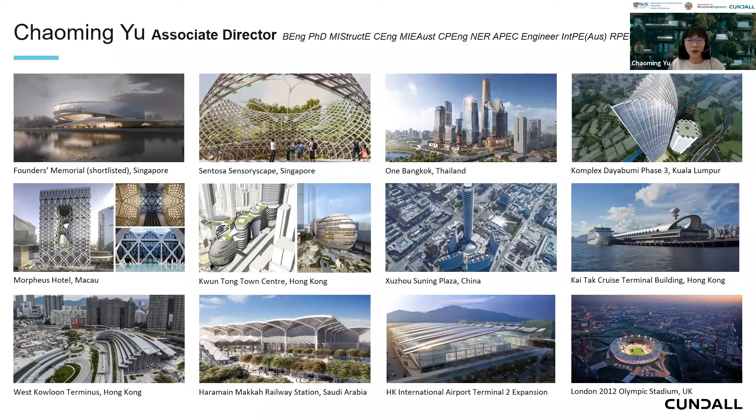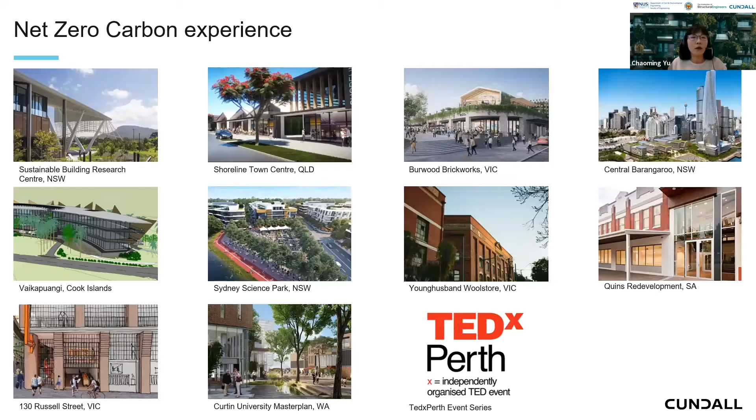About Cundall, Cundall is a multidisciplinary consultancy, and we have 21 offices globally and 8 offices in the APAC region. We became a One Planet company in 2012 and the first carbon neutral consultancy in 2020. Cundall recently launched a Zero Carbon Design 2030 initiative. We target to design all our projects to be zero carbon by 2030. So here are some of our net zero carbon experience around the world.

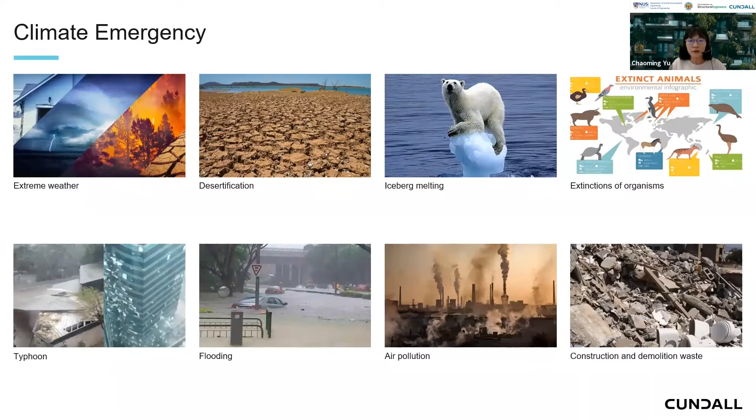So why design for net zero? We are all aware that we are living in a climate emergency caused by increased carbon emission. There are extreme weathers, typhoon, flooding, iceberg melting, extinction of organisms, and air pollution. So if we don't take any actions and keep increasing the carbon emission, it will cause catastrophic results very soon. As an industry, the building and construction sector is responsible for 38% of global carbon emissions. This is based on last year's data, and we consumed a staggering 40% of the world's natural resources. So all this has a major impact on our planet.

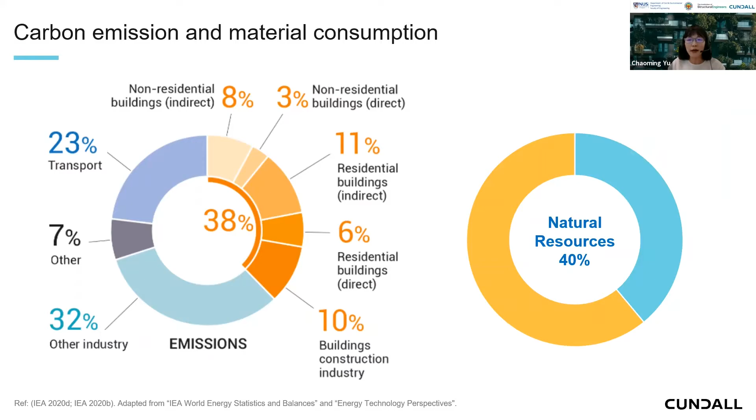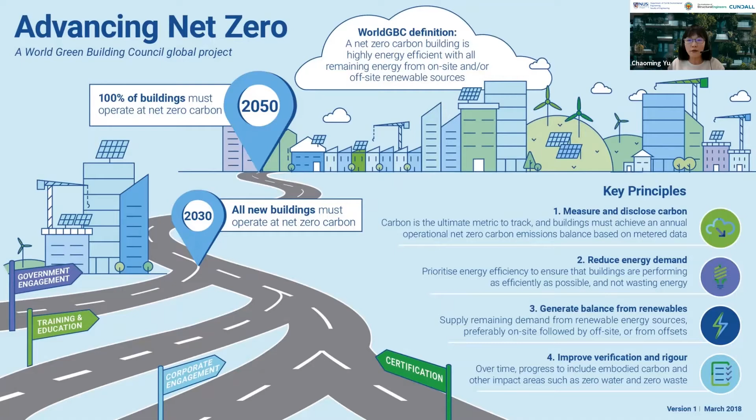So we must make a change to reduce the carbon emission. The World Green Building Council initiated the Advancing Net Zero program to promote working towards decarbonization by 2050, in order to limit global warming to less than 1.5 degrees Celsius. So here are the targets: by 2030, all new buildings operate at net zero carbon and reduce at least 40% of embodied carbon. By 2050, all buildings to be net zero in whole life carbon.

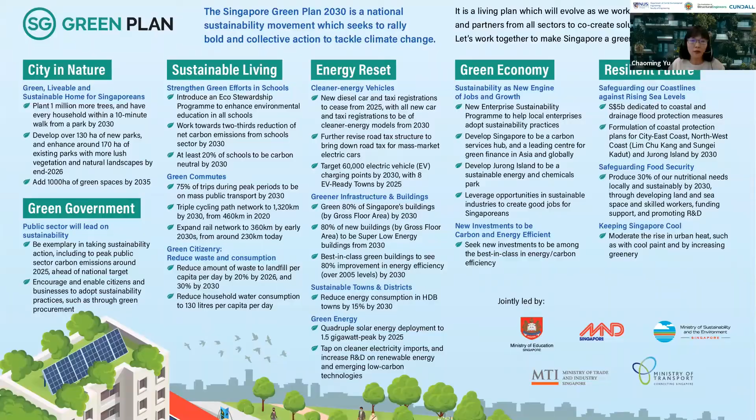And in the recently released Singapore Green Mark 2021 document, it basically aims to raise the built environment sustainability standards and encourage conducting whole life carbon assessment on both new and existing buildings.

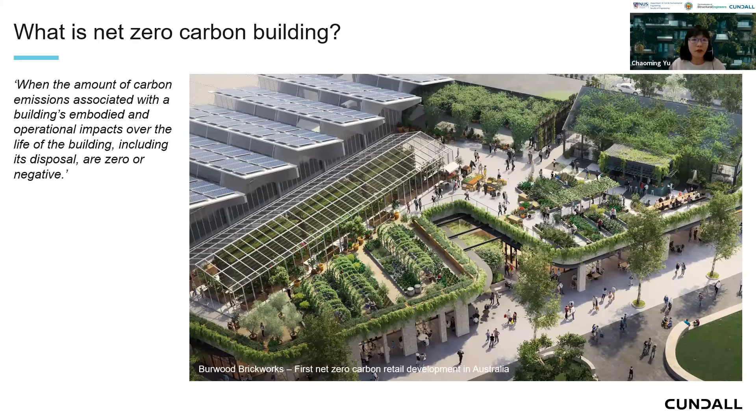So you may ask, what is a net zero carbon building? The definition is: the amount of carbon emissions associated with a building's embodied and operational impacts over the life of the building, including its disposal, is zero or negative.

So we understand the total carbon footprint for buildings is composed of embodied carbon and operational carbon. And we need to look at the whole life cycle to ensure the carbon emission of the building is zero. So in order to do that, we need to decrease both embodied and operational carbon as much as possible.

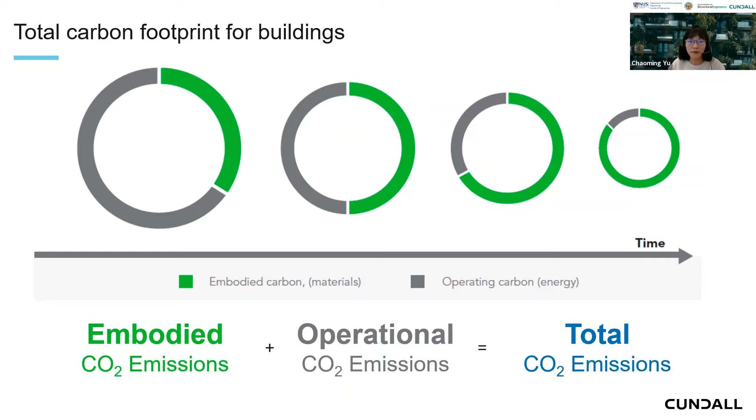This is Cundall's 7-step strategy in achieving net zero carbon. So it's from passive design optimization, reduce operational energy demand and consumption, eliminate fossil fuels like coal, gas, oil, and provide on-site renewable energy and storage where possible.

We should maximize using renewable energy like solar panels and wind energy, etc., and limit the upfront embodied carbon. Consider whole life carbon in conjunction with whole life costing, and publicly disclose performance annually using the WRAP database.

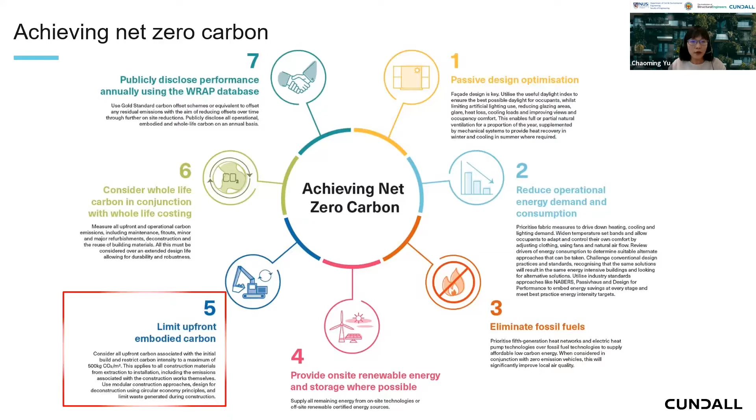So for structural engineers, our focus would be limiting the upfront embodied carbon.

So what is embodied carbon? The embodied carbon is the carbon footprint of a material. It's the total greenhouse gas emissions generated throughout the life cycle of the material.

This chart shows the building whole life cycle stages, including the upfront, which is from A1 to A5, including material extraction, manufacturing, transportation, and installation. And for the in-use stage, which is from B1 to B7, it covers maintenance, repair, replacement, and operational energy and water. And end of life would be deconstruction, transport, waste processing, and disposal.

For stage D, the reuse, recycle, and recover is beyond the building life cycle. As you can see, except for B6 and B7, which are operational carbon, all the rest is embodied carbon.

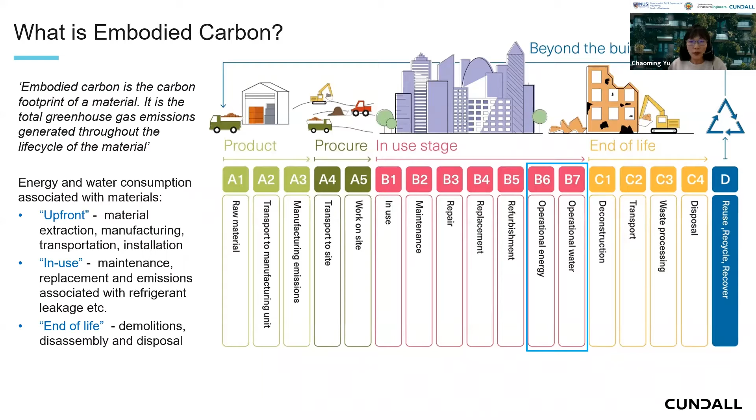Here I give an example, actually from the IStructE guide. It's an indicative distribution of A1 to C4 emissions for an ultra low energy residential model. The operational carbon is only taking 23%, but the upfront embodied carbon is taking as much as 55% of the total carbon footprint.

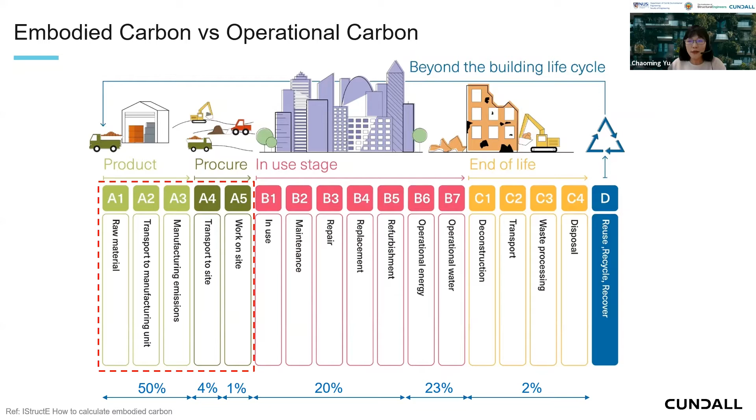So this part shall be our focus to reduce. Also, this is the minimum scope for a structural embodied carbon assessment.

In terms of the proportion of embodied carbon directly attributable to the structure, it is in a range of 50 to 85%. As you can see, the structural embodied carbon would contribute to the most of the carbon footprint of a building. It is our responsibility to manage and reduce this part of carbon emission.

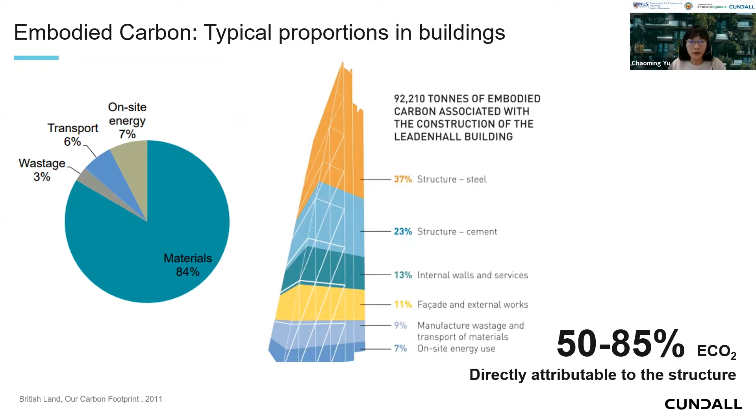Then how to calculate embodied carbon? Basically, it's the material quantity times the carbon factor for the life cycle modules.

IStructE published a guide called 'How to Calculate Embodied Carbon' last year. It's very informative and useful for understanding the methodology. I recommend everyone to have a read if you are interested.

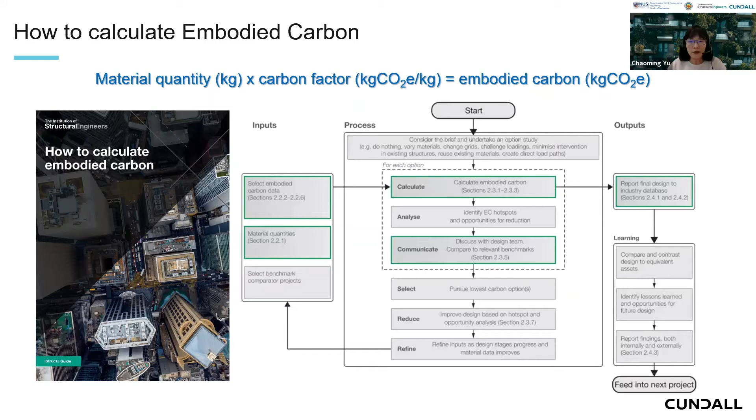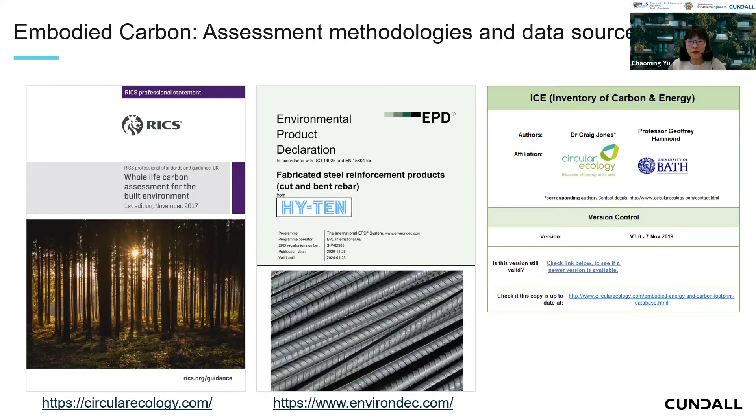And there are also other guidance and databases you may refer to, like RICS whole life carbon assessment for the built environment, and the ICE, the Inventory of Carbon and Energy database, which is a commonly used database that provides the carbon factor for stage A1 to A3.

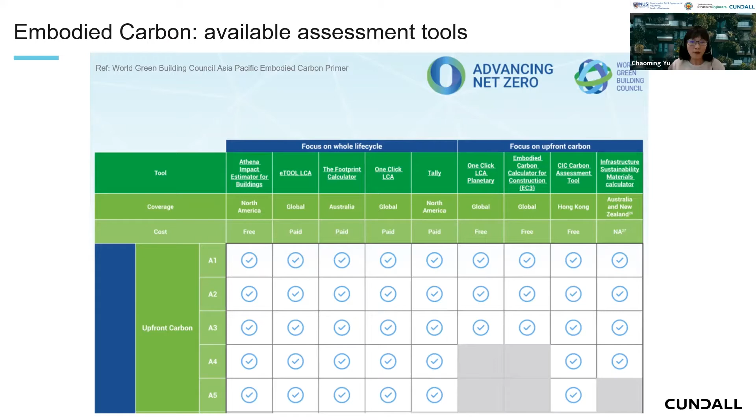And here I selected some tools. One is IStructE's structural carbon tool. It covers the whole life cycle carbon assessment.

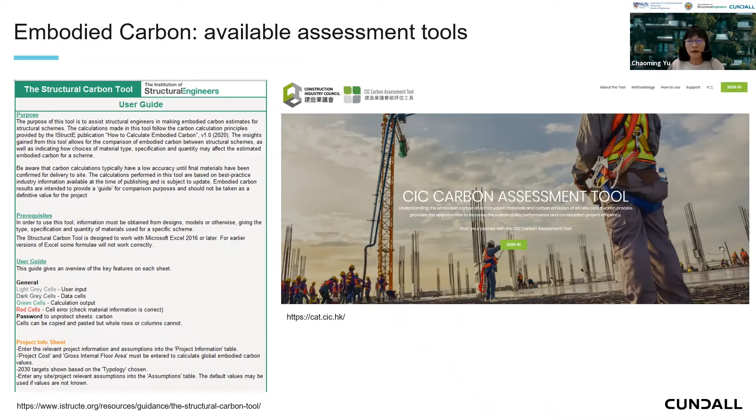And another one is the Hong Kong CIC carbon assessment tool. It's an online assessment tool, and Cundall assisted the Construction Industry Council in the development of this tool. They are both free to use, so you can give it a try to help you understand embodied carbon assessment.

In Singapore, according to the Green Mark 2021 document, we can use either the BCA carbon calculator or the ICE carbon database. The current BCA carbon calculator has a limited database. For steelwork, we only have two options: primary steel and recycled steel. So it wouldn't be very accurate to use for assessing embodied carbon on the project.

But I believe this will be further developed to include more materials. In the meantime, we can refer to the ICE database. As the carbon factor is geography dependent, before a more developed database becomes available, I would suggest reviewing the

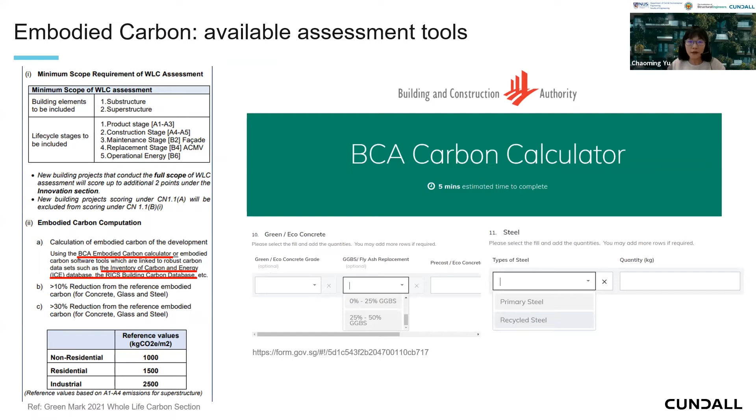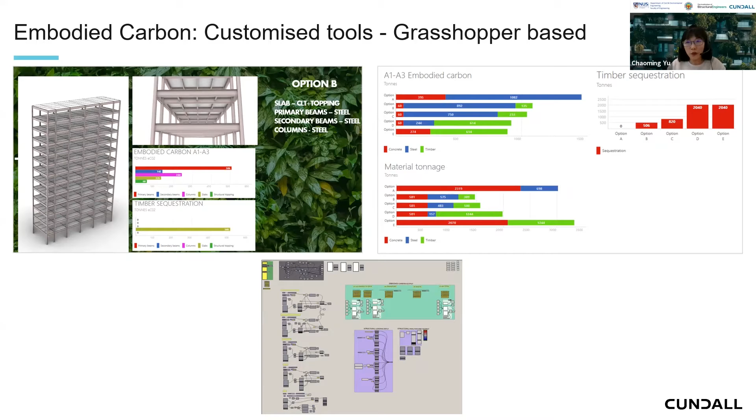carbon factors used on the project with the supplier to ensure the assessment is more project specific. Besides the commercial tools available in the market, you can also build your own tool using the applicable database. Here it shows our in-house Grasshopper-based tool. It can assess the embodied carbon for different options efficiently and present the results graphically, so it's very straightforward to show which option gives the lowest embodied carbon.

We also developed a Revit-based tool via an in-house Dynamo script. It can assess, tabulate, and present all the options against the target in one go.

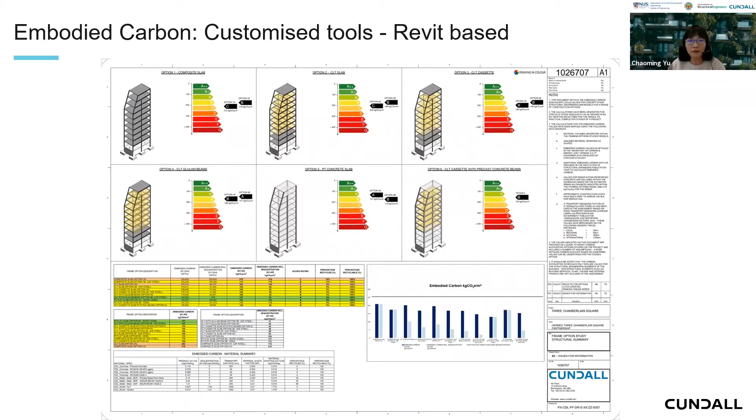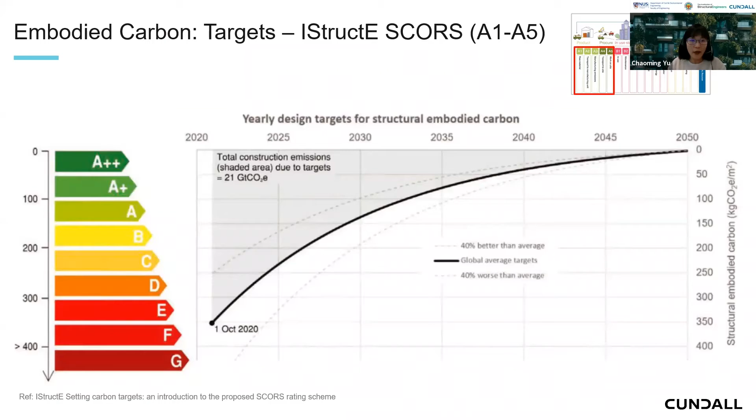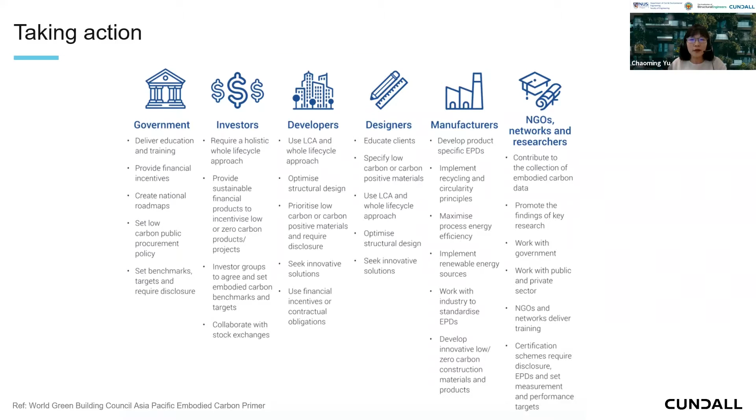Then how can we reduce embodied carbon to meet this target? This is a joint effort by all the parties, from the government to the investors and developers, designers, manufacturers, and researchers. So we as designers shall educate clients and let them understand the impact of embodied carbon, specify low carbon materials, and use the life cycle assessment approach, basically from the beginning of the project to the end. And we should optimize our structural design and seek innovative solutions.

So for the big picture, we shall design for the circular economy rather than the linear economy. The linear economy is to design, build, demolish, and dispose. But the circular economy is refurbish, reuse, reduce, and recycle.

So we should conserve resources to minimize the quantity of structural material used, and specify and source materials responsibly and sustainably. We should design to eliminate waste and ease of maintenance, basically design for reusability and flexibility, and manage the waste from demolition, excavation, and construction.

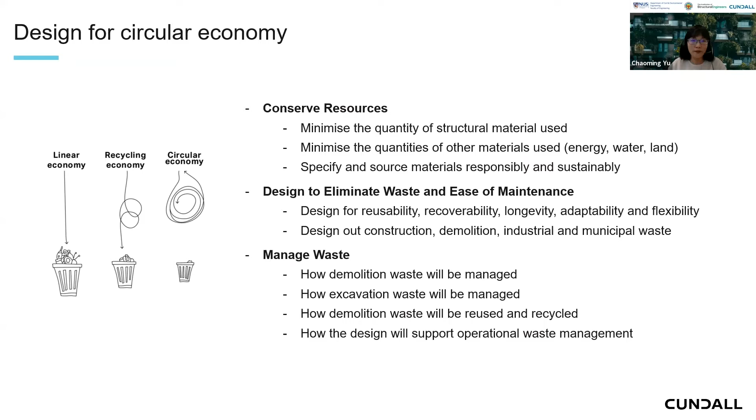So basically at the planning stage, we can challenge the brief and propose alternatives. Do we really need to demolish the existing building and build a new one? Can we just reuse the existing building structure? Can we just do some refurbishment, A&A work, basically to reduce the majority of the embodied carbon for the building?

And during the design stage, we would focus on building clever, so basically making the low carbon solutions, like specifying low carbon materials and doing structural optimization.

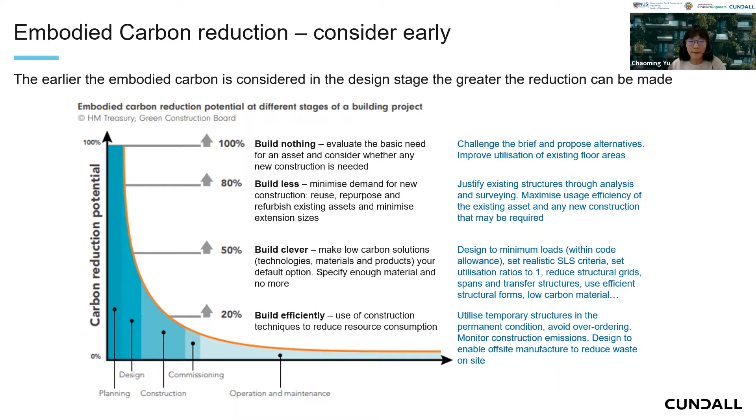And in the construction stage, you can see the potential for reduction is the least, because what we can do is only focus on construction techniques to reduce resource consumption, like utilizing temporary structures in the permanent condition and maximizing prefabrication to reduce waste on site.

So we know the biggest reduction on embodied carbon is to reuse and refurbish the existing building. However, more than 90% of buildings in the world were demolished before the end of their serviceable life. So we need to change our industry's mindset to move towards a more sustainable development direction.

Here I selected one project example in London. This is an office building, and they refurbished the existing building structure and added a few floors on top, and replaced all the facade with 85% recycled glass and 100% recycled aluminum, and used 80% recycled steel.

So just from reusing the existing structure and saving the construction waste from building a new structure, it saved more than 21,000 tons of carbon emission. So it's really massive. We should really consider reusing and refurbishing existing building structures.

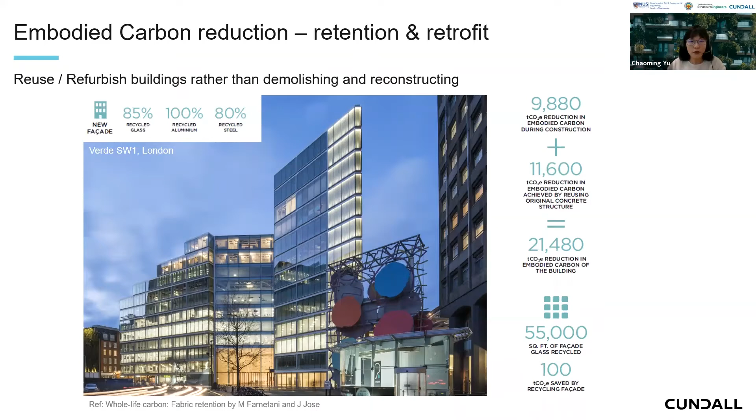As embodied carbon is the carbon footprint of a material, we should specify low carbon materials on the project in order to reduce the embodied carbon.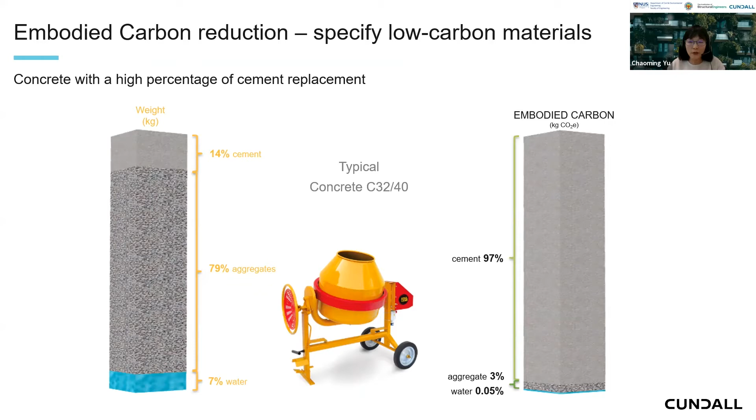Concrete is the most popular construction material, also in Singapore. If we look at its mix, the biggest component is aggregates. This is showing typical concrete C32, where aggregates take 79%. But if we look at its embodied carbon, cement is actually taking 97% of the embodied carbon. This is because most of the carbon emission was generated from the chemical decomposition of limestone. So if we reduce the percentage of cement in concrete, the embodied carbon will decrease.

There are also other types of low carbon concrete being developed, such as carbon cure concrete. It has carbon dioxide injected and mineralized during the concrete production, so the carbon dioxide will be captured within the concrete. And the mineralized carbon dioxide will strengthen the concrete as well.

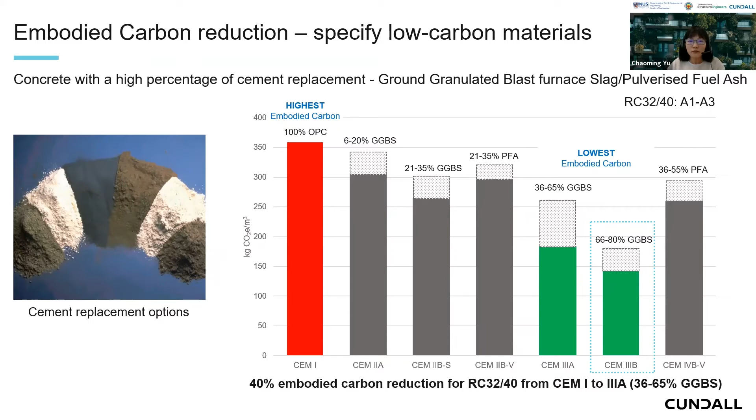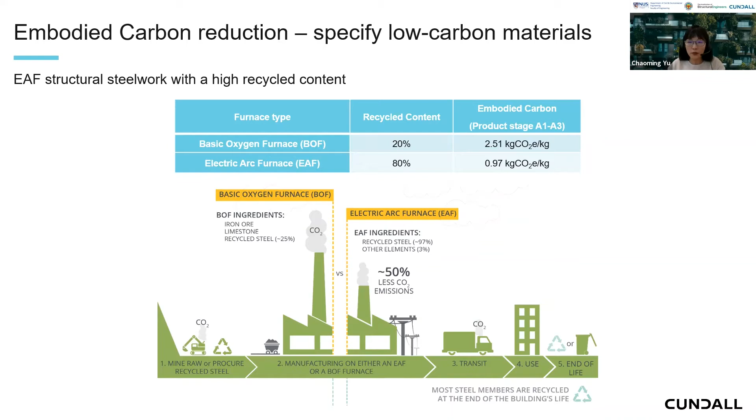For the steelwork, the conventional basic oxygen furnace makes steel using raw material inputs. The electric arc furnace can make steel using scrap steel and renewable energy. With a high recycled content, the embodied carbon of EAF steelwork is significantly lower than conventional basic oxygen furnace steelwork. So we should specify high recycled content steelwork on projects as much as possible to reduce the embodied carbon.

Timber is a low negative carbon material. We say it's negative because it captures carbon dioxide while the tree grows. This is called carbon sequestration. The carbon dioxide is temporarily stored within the timber and will be released at end of life.

So normally we will not include the timber sequestration in the total embodied carbon figure when we do the assessment, but just have it listed separately, as it really depends on how the timber will be dealt with at end of life, whether it's going to be reused, burned, or landfilled. This carbon sequestration may be partially or fully released into the environment.

Besides this kind of mass timber structure, we can also consider the hybrid timber structure, which gives more flexibility in terms of material use. For tall buildings, we can use timber floor and timber beams as the floor framing system, then use other materials for the vertical elements due to strength efficiency.

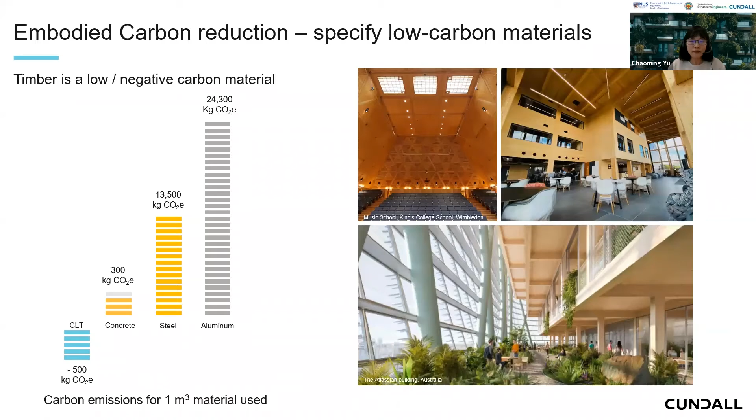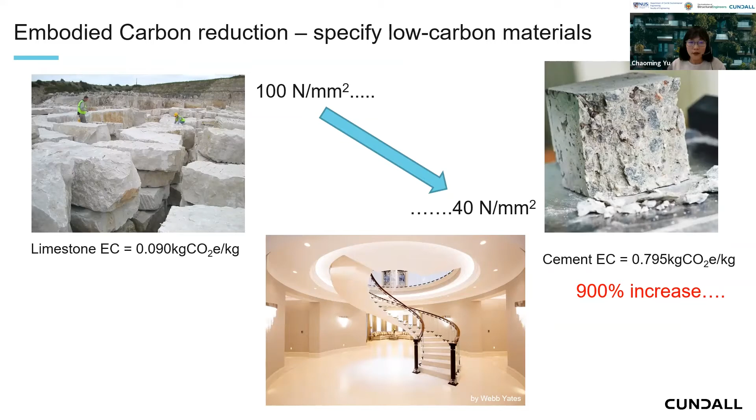Stone is also a low carbon material. As you can see on the diagram, a much higher strength stone has a very low embodied carbon compared to concrete. Although it's not a popular material in modern construction due to its constraints, we can still consider using stone for things like a staircase or facade cladding panels.

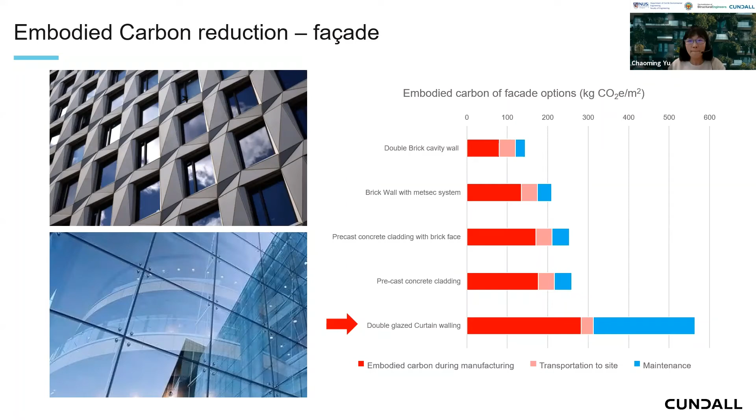Another potential in the design stage to reduce embodied carbon is to do structural optimization. Even without considering embodied carbon, we should always do structural optimization, trying to propose the most efficient solution for the project. Here is our approach: we should optimize the structural design holistically from overall structural stability, performance, deflection, material strength utilization, as well as embodied carbon reduction of adopted structural materials.

We should build light through the use of lightweight materials like lightweight concrete, timber, steelwork, and also with reduced spans. We should propose buildings with spans that satisfy the function use rather than going for super long spans without the need, because that helps reduce material quantity and propose a more efficient structure system.

And we can also use high strength materials like high strength steel and high strength concrete, which will reduce the quantity of material, along with efficient structural systems.

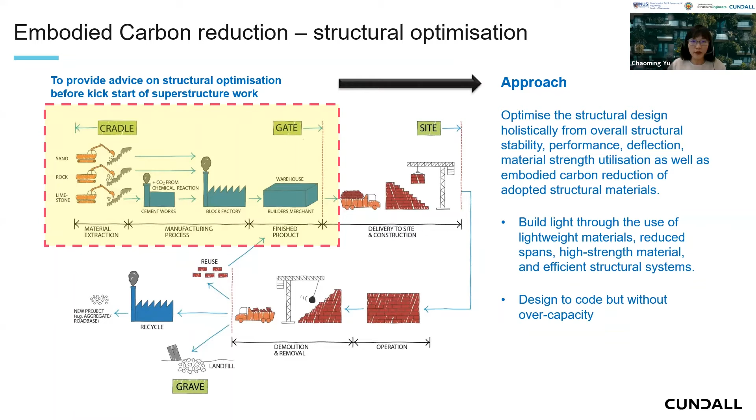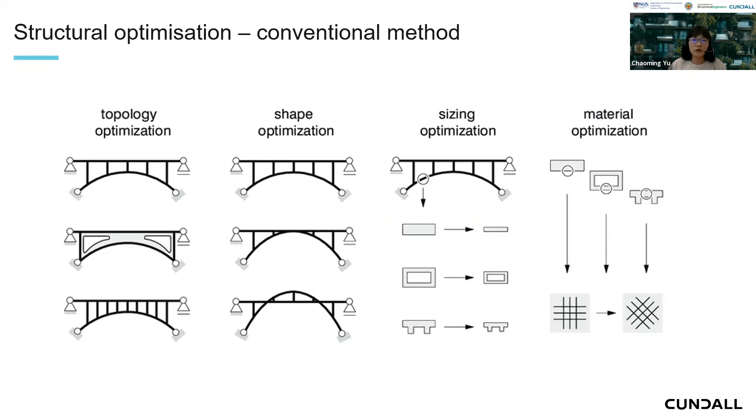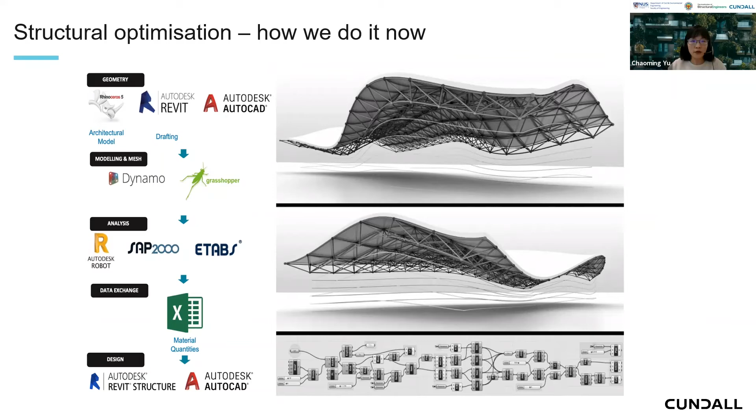This is how we do it now by implementing computational design to automate the process. We can build the geometry, loading information, section, and material properties via parametric modeling, and adjust all these parameters efficiently to find the most efficient structural design.

Here is a snapshot of our in-house script doing the structural optimization.

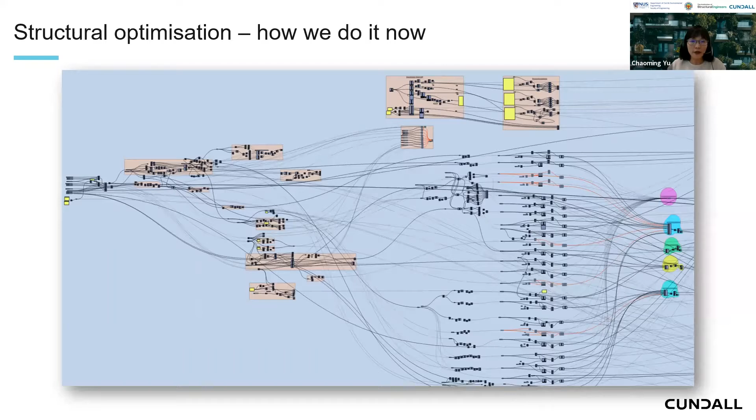To reduce the embodied carbon, we should also minimize on-site construction work to reduce the waste and energy used on-site. So prefabrication should be considered and maximized.

When we talk about prefabrication, maybe a lot of people will think of PPVC, but PPVC is suitable for residential buildings or hotels, not applicable to all other building types, like large open office space or retail. But we can still consider prefabrication because it's not limited to PPVC.

It will range from components, like single elements, to modules. All the steelwork would be prefabricated, and also precast concrete members are prefabricated. In terms of modules, we can also specify facade panels and bathroom pods to be prefabricated units.

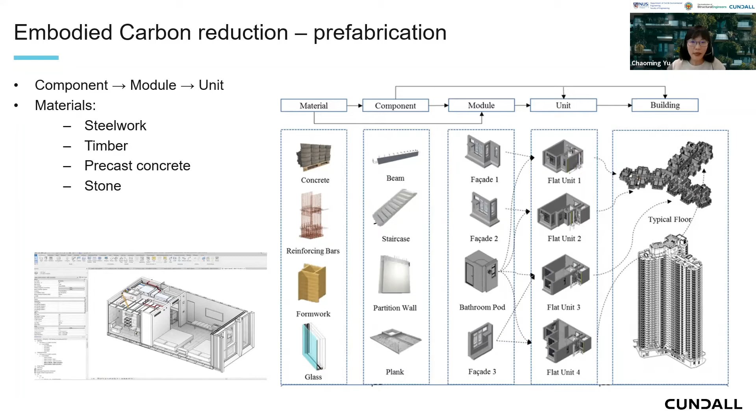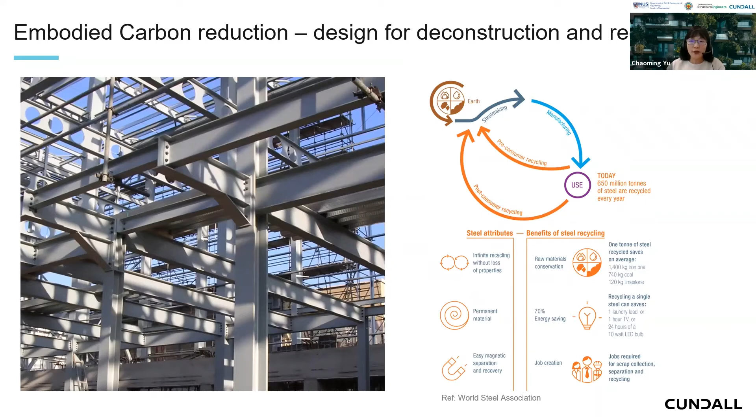We should also design for deconstruction and recycling to minimize demolition waste. For steel structures, bolted connections can be easily disassembled and recycled, and marked steel members with product information can be reused. Similarly, for timber structures, screw fixing can also be easily disassembled at end of life.

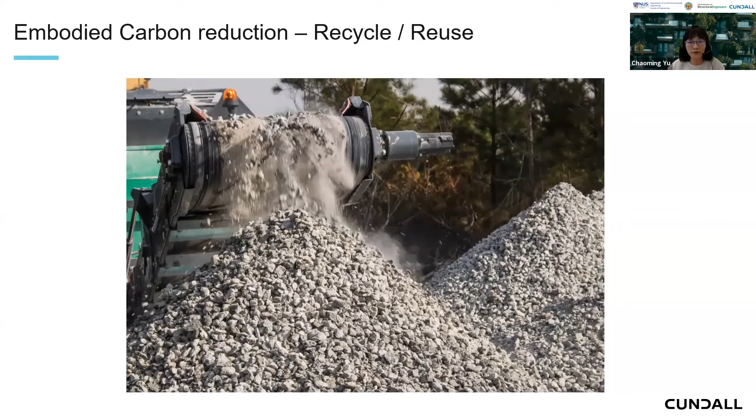For concrete, instead of landfill, concrete can be recycled. The crushed and recycled concrete can be used as a paving material or aggregate substitute for mixing new concrete.

Here I'm going to show a case study in which the embodied carbon assessment is integrated with a structural optimization exercise. The project is an office tower in Tokyo, Grosvenor's first zero carbon ready building in Japan. We were appointed by the client after the structural design was completed, to look at the possibility of using different materials and what influence that would have on the embodied carbon of the project.

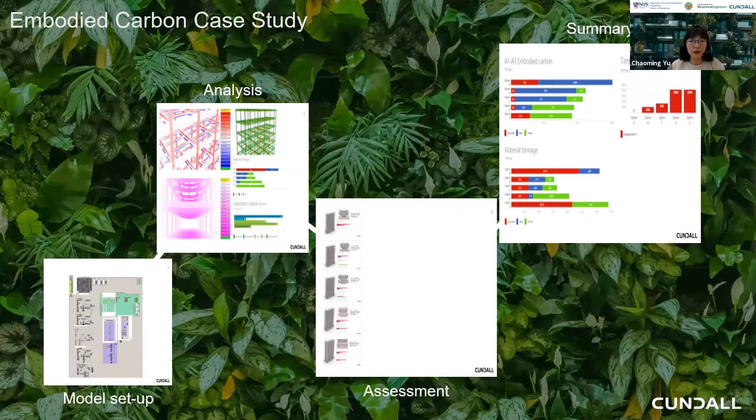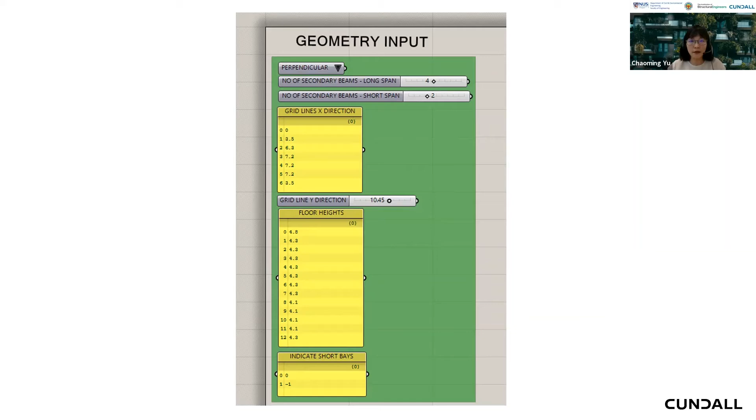Here is the geometry input. We include the grid line dimensions, the floor height, and the number of bays as variable parameters, and we can change these easily later on if we need to adjust the design. Here are the components for setting up the geometry of the building.

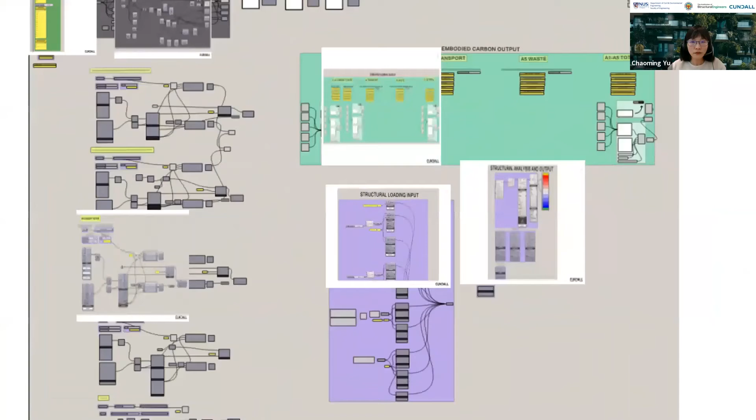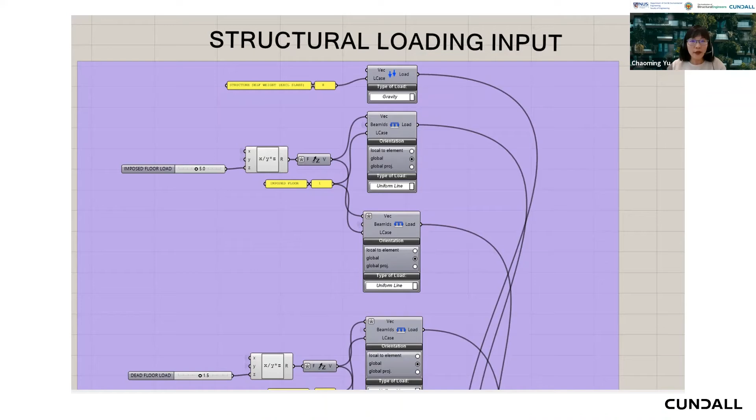These are the components for the loading input. Again, for loading values that can be variable parameters, and we can define the loading application direction and also the different load cases.

And here it comes to the structural analysis and output. We can plot the stresses, the displacement, utilization ratio of the member, or the forces and bending moments.

This one is our script for the embodied carbon output, covering from A1 to A5. For A1 to A3, called cradle to gate, this is the data we took from the ICE database. For A4, which is transport, it really depends on where the sections are manufactured, and that can be calculated based on the distance of transportation and the weight of the transport. And for A5, the waste, it depends on how the construction waste will be dealt with.

Normally, we can just assume a percentage to estimate this part of embodied carbon.

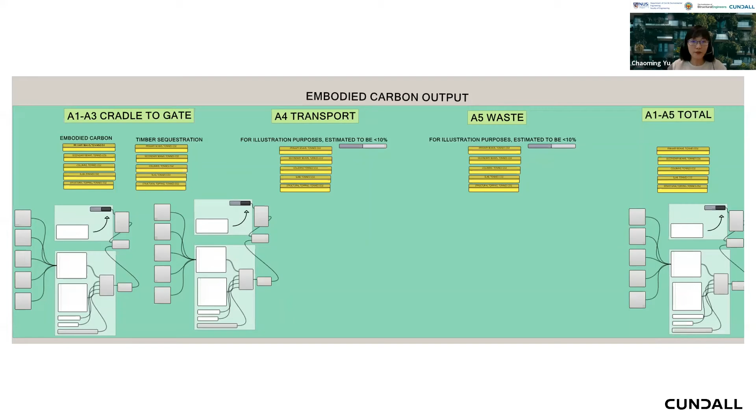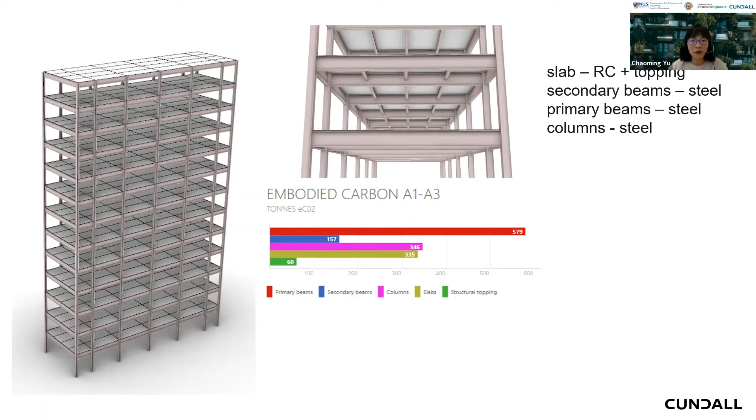Here are the 5 different options we studied. The first one is the base scheme, proposed by the structural engineer for the project. It's a precast concrete plank with structural topping for the slab, and all the primary and secondary beams are in steel, and the columns are also steel. Here we can plot charts based on the different structural elements to see which one is actually taking the most of the embodied carbon.

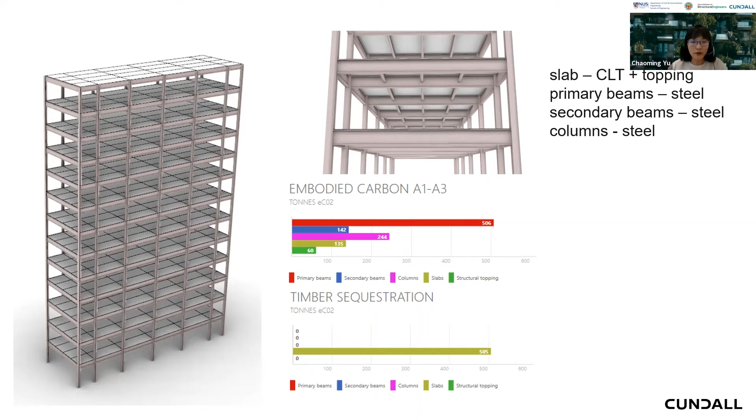For option 2, we replaced the RC slab with a cross-laminated timber slab with concrete topping. The concrete topping helps the acoustic performance of the timber floor. Here we have the embodied carbon results for the different structural elements, and we also list out the timber sequestration as a separate chart to understand the influence.

Option 3 is similar to option 2, but just replacing the secondary beams with glulam timber beams. So we will have more timber sequestration and less embodied carbon.

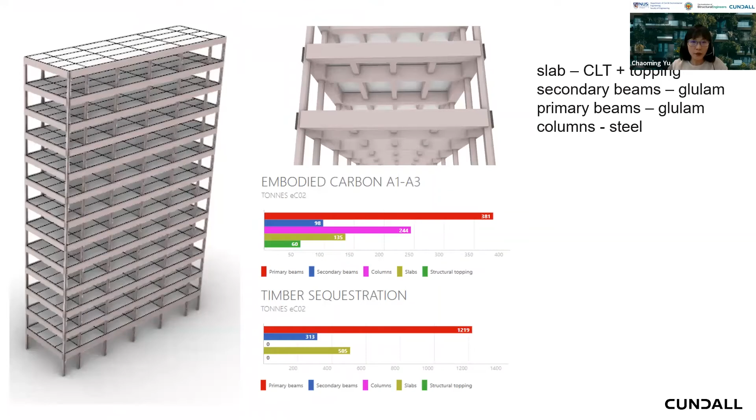Then option 4 is basically where all the floor framing system would be in timber, and the column still in steel. Option 5 is similar to option 4, just replacing the columns from steel with RC.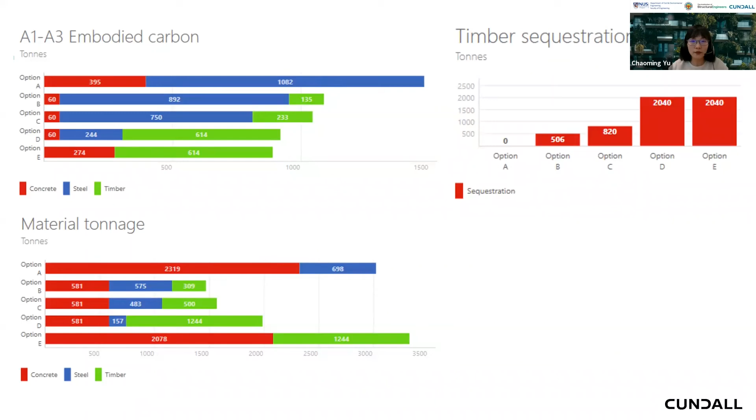So now I would summarize on embodied carbon reduction. We should consider it early in the design stage, because the earlier it's considered, the bigger reduction can be made. We should maximize reuse and refurbishment of buildings rather than demolish and reconstruct, and specify low carbon structural materials like concrete with cement replacement, steel with high recycled content, and timber and also stone.

We should conduct structural optimization on the project during the design stage. In the meantime, carry out the embodied carbon assessment to determine the prime solution for the project. We should also consider prefabrication to reduce construction waste, which will help reduce the construction program and also give higher quality products. And we should also design for deconstruction and future upcycling.

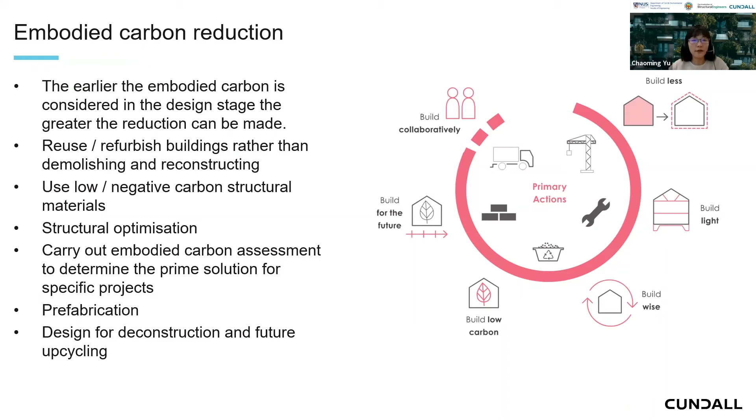So that's all of my presentation. Any questions would be welcome.

Okay, thank you, Chaoming, for the very informative sharing. I personally learned a lot about carbon neutralization today, from a global perspective to the net zero movement in local context. It's a very detailed account of fundamentals on embodied carbon. Once again, on behalf of IES-IStructE Joint Committee, thank you for taking your time to promote sustainable design and how we as structural engineers play an indispensable part in offsetting carbon emissions. It's meaningful for us to first understand in what way each of us can contribute. I'm sure our campaign against carbon footprint will slowly gain traction.

There are some questions in the chat group. Maybe first, let me read out the first question. Yep, okay, the first one is Ziyue asking. Okay, wait. Can you read the question, Dr. Yu?